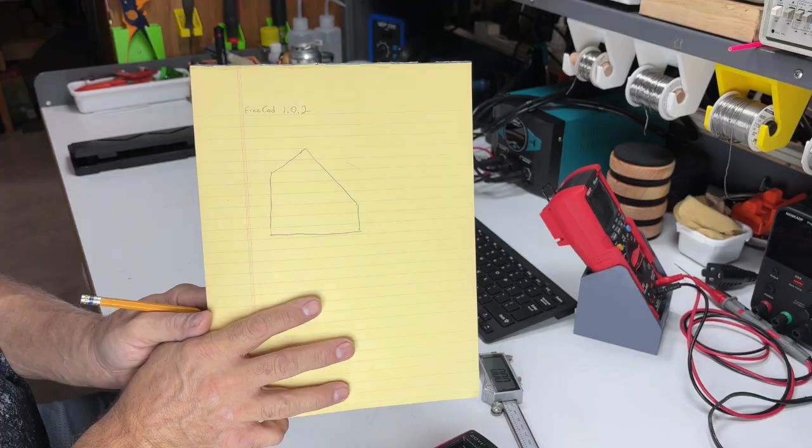So this is just a side kind of profile view, and we'll turn this into a three-dimensional drawing, just to give a little better representation so we can get our width - write down our width, which we'll start with.

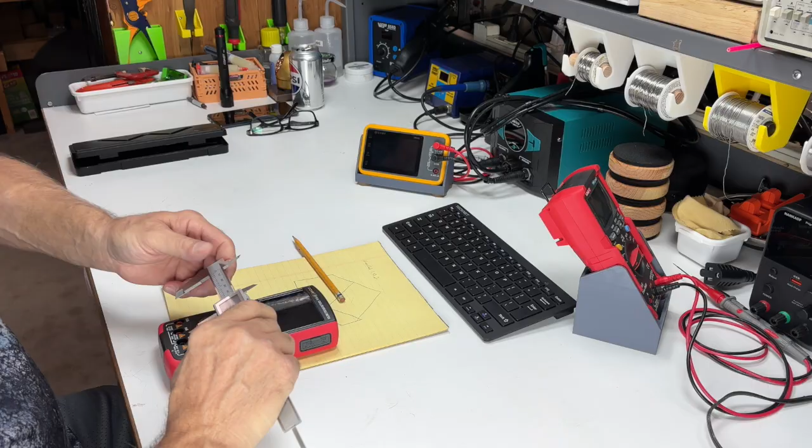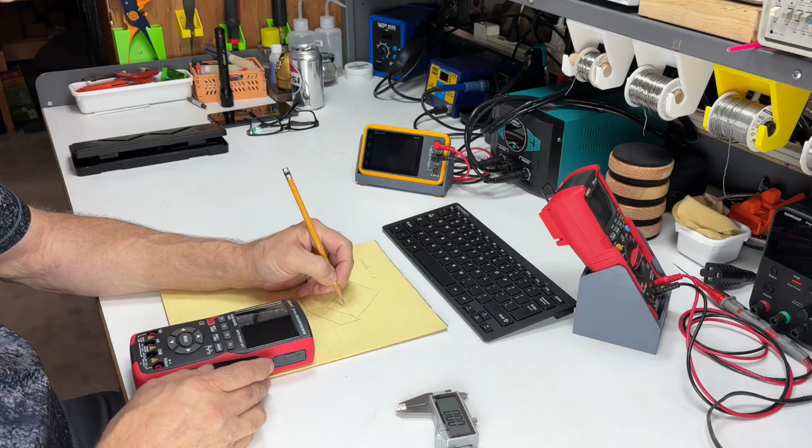I'm gonna call this - we'll call that 85, and these are the internal dimensions. When I'm measuring the external of anything, these are going to be the internal dimensions. So it's 85 to get it to fit in there, millimeters. Make a little note there. And then I do 3 millimeter sides, or pretty much anything like that, so we've got to add 6 onto that. So the overall width is going to be 91 millimeters. Sorry, I don't have an overhead camera working yet.

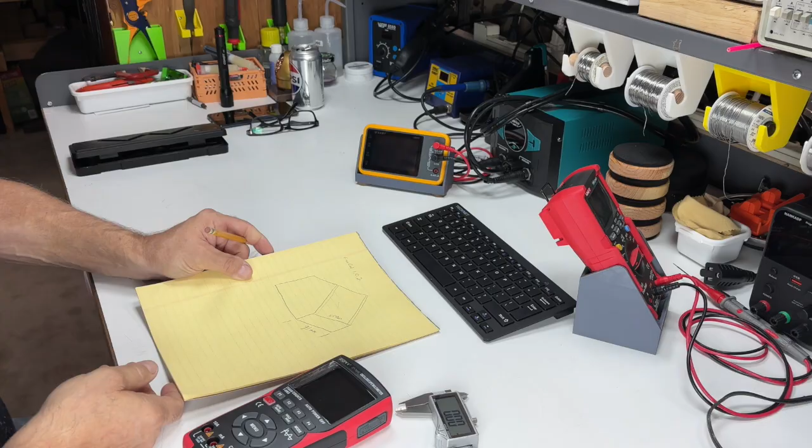Okay, then we need this - that was the width. We kind of need the front to back, or depth, I'm going to call it. And that looks like about - we'll do 38. So that's going to be the depth of the pocket, 38 millimeter depth.

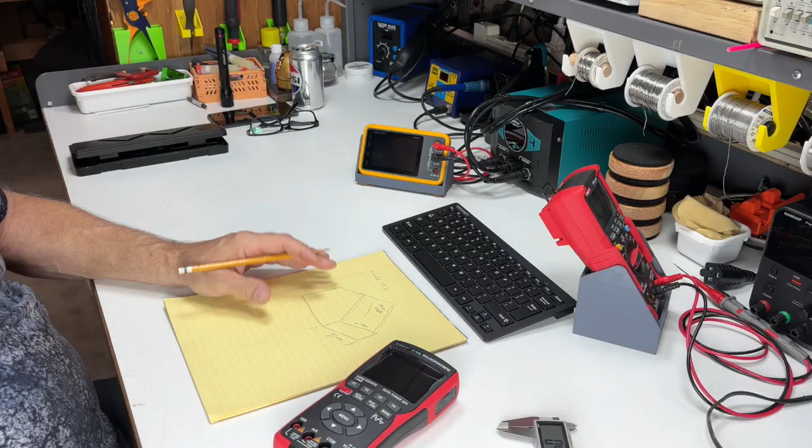And then I just kind of have to hold it up and do an estimate. You could actually do this on the paper - this is where, say the leading edge of the paper here is going to be where we want the flat front end, and 86 is right about here, so we'll just make a mark here, and then we can measure that. We got, we'll call that 96 millimeters.

That's 91, and then the height here will also be - it's kind of a judgment call here. We're gonna go with 90, yeah, we'll go with a 90 on that height. This is going to be a 90-degree corner.

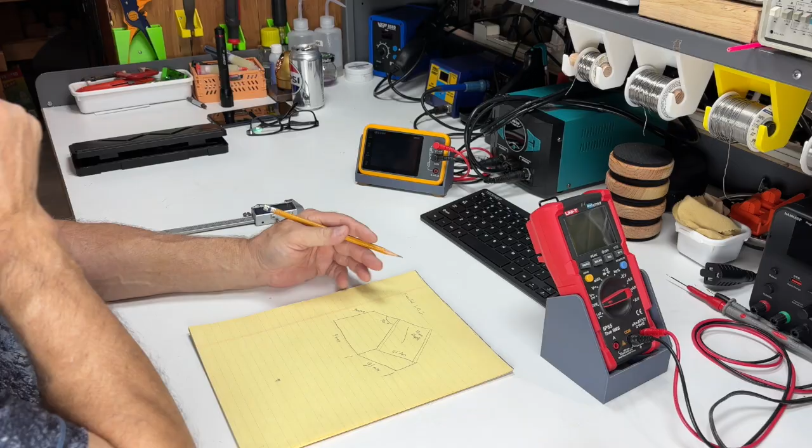So here's what we're up to now, and I think that should get us close enough to open up the FreeCAD program and get going. Don't forget to turn off your calipers so you don't waste any batteries. Let me get my keyboard out here and my mouse, and we'll be back in a minute with a different camera angle.

So I'm going to try and go slow, and this is kind of one of the most important boxes, right up here. Mine came up as Sketcher right now, but everything I have done - I have made a lot of very complex multi-gimbal swivel mounts. These are just some of the simple ones - I'm going to try and show a simple meter base, because this would be something I think a lot of my viewers would like, plus my best friend up north seen the couple I had, like I said earlier, and was very interested in.

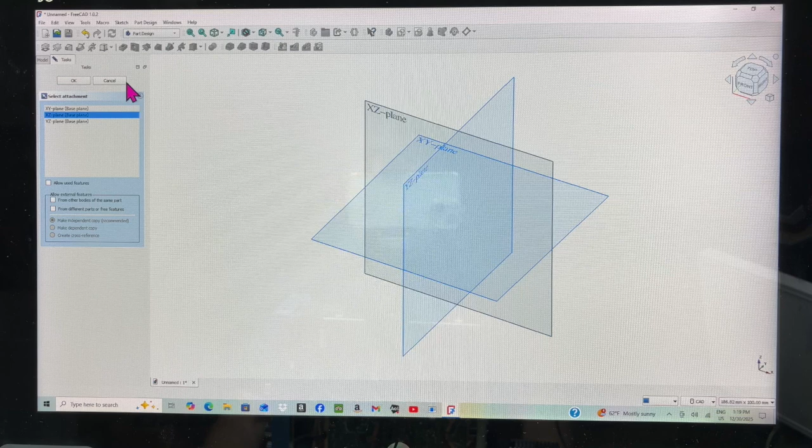You can either click on one of these to highlight it. Here's the XZ, which is what I would use for this particular project. So you can click there and hit OK, or you can just come over here and double click on the plane you want.

So I'm going to go ahead now and make that side view that I showed you earlier. It's just a rough sketch. You don't have to make it perfect, because we're going to put the dimensions in later.

But a couple of key points are here where we're going to go up first, and I got to find my... I must still have the old version on my other laptop that I usually work on.

So there's this weird shaped thing between the single dot and the single line, and this just allows us to make several points in any various shape. So I'm going to click on that. It's called a polyline. So we're creating a polyline.

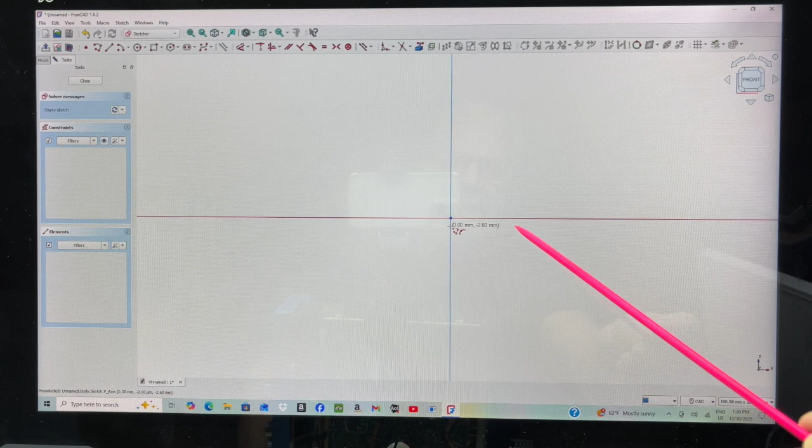That just tells you that you made contact with that line, and you do want to watch for your contact points. If you come right up to dead center, notice you get the X, and that's what we're looking for in this instant. That locks it into that point. And so that one is important, the first one, and then left click. I find it easier when you got the X, just let go of the mouse and then left click.

And then we can come over here, and you see here we have all of a sudden that half arch shows up. That means we're locked onto that line. It gives you some dimensions there too, but I don't usually worry too much about that.

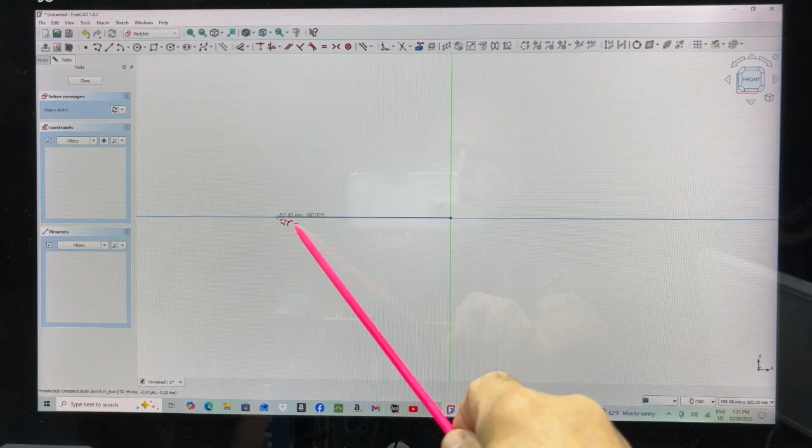This is going to be smaller. Also, the other indicator here too, so we're locked onto the line. We are also in a perfect horizontal position. So even if you're slightly off a little bit, the line disappears there. We got contact. When we click on that, it will make it perfectly horizontal.

And then we're going to go vertical. See, like right here, well, I'm going to make this one crooked intentionally, just so I can show you how to straighten that out. And then we're going to go up here.

Let's just say anywhere here. Like I said, we're just making a rough drawing. Now we're looking for that half arch again, because we want to be locked on that line. And then click. And then we're coming down, and we're going to connect with that very first point that we made.

And there we got the X, and we can click on that. And now our box is contained. You right click a couple times to get out of the tool. The lines are orange here, so that means something is weird.

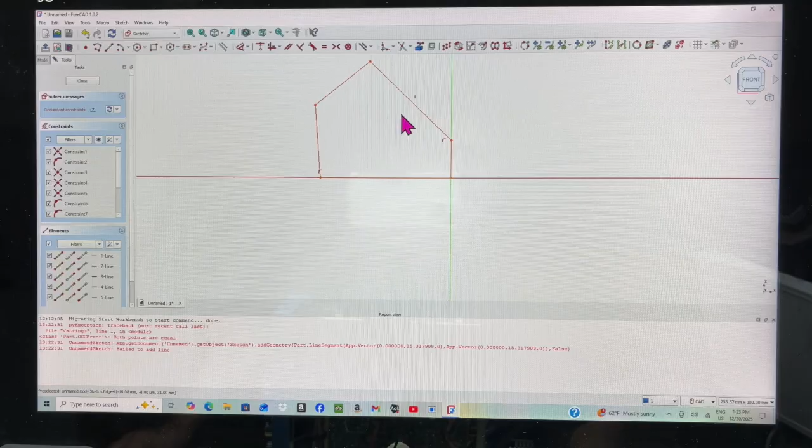We want them to be white, and so sometimes you have to... I clicked on that little vertical line there, they turn green, and then hit the delete key. Nope, that didn't do it. It's probably one of these arches then. I don't know if that was that last one. Usually if you pay attention, you can know which one it is. Okay, there it is. It went away.

Now we got the black line. And if you grab any one of these points now, you can see everything is still all movable because nothing is locked in.

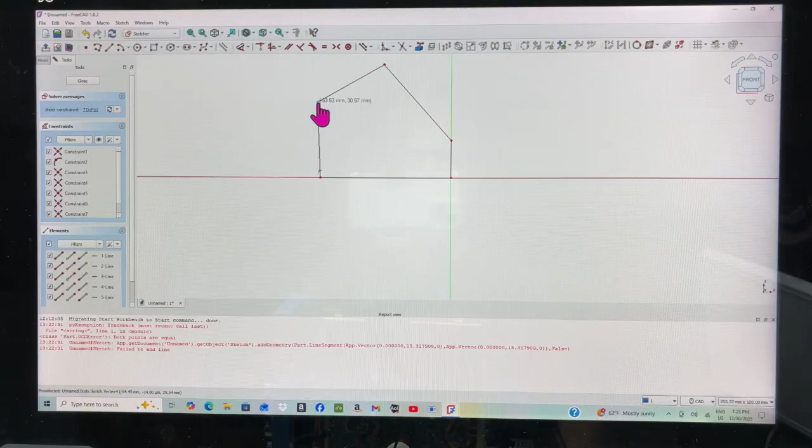And the lines are all, so you can do any kind of weird shape. So don't get too excited about trying to get things perfect. Just get it all kind of laid out.

And then we're going to go to those dimensions, like our base right here. We're going to click on our baseline and see how it highlights. You can choose different colors - this is just what came up. I haven't changed them. I did the download this morning for this particular computer because it'd be easier to see, I think.

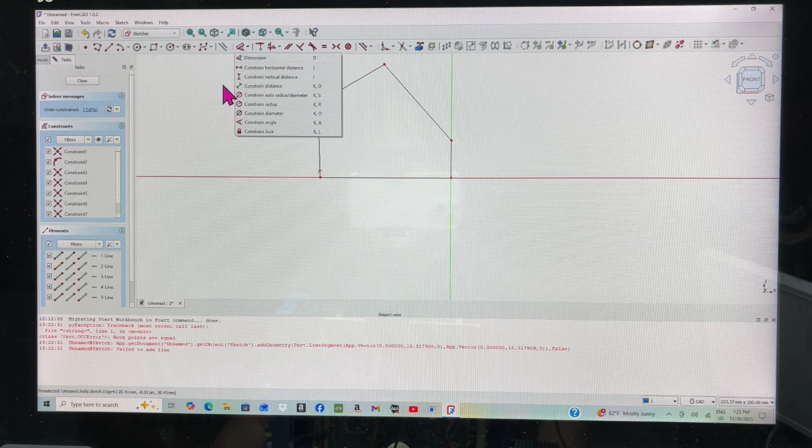So I've clicked on that, and now I have to go up and find... okay, so now this is it. You have to click on this box. I think it was simpler the other way. So we're doing a horizontal line, so we want to pick - here's your horizontal, here's your vertical. These are weird, anything that isn't straight across horizontally or vertically, then you would use this line. But we're doing a horizontal one, so we're going to click on that. And I guess we're going to come down and click on the line.

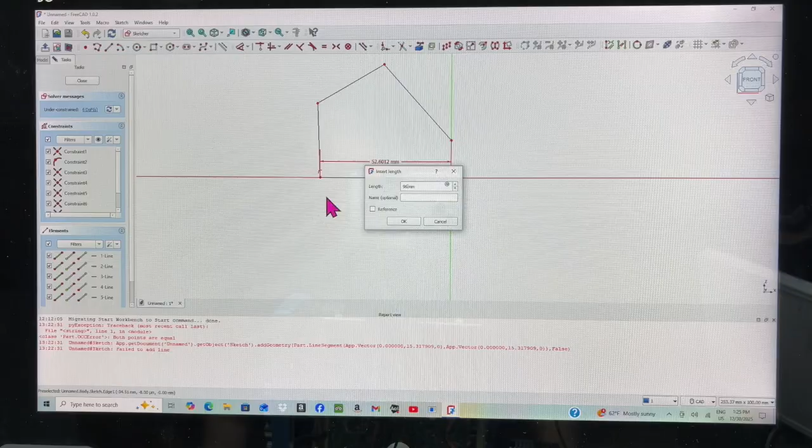And now we can put in our length, which was, for that base, was 96 - I have my keyboard back here - 96 millimeters. And we put in 96, and then you can come down here and hit OK. And that stretches it out here. We're going to zoom out a little bit.

Screwing up here, trying to make it bigger in the center. Okay, well we're going to have to go up higher anyway. So that's our width. And then our height here, we're just going to - I'm going to right click to get out of that. I'm going to just drag this over because this is going to be one of our vertical lines. And go up to here, I guess, again.

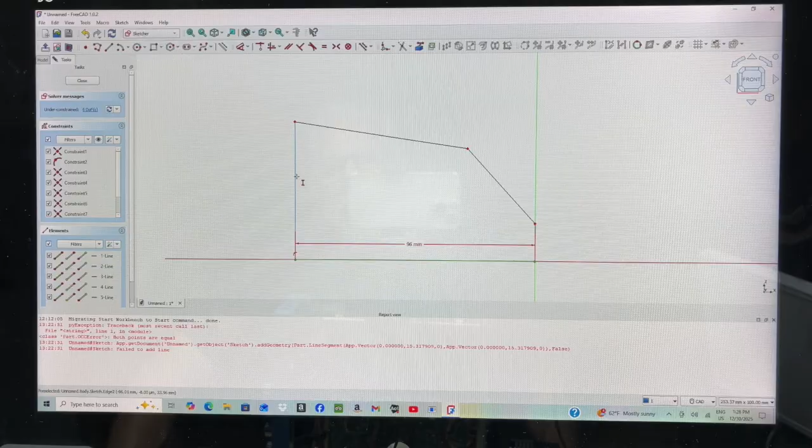And we are going to go to our vertical constraint. And then when the line turns, in this case, light blue - like I said, your colors could be different - you see it change. It goes from whatever it is standard to when you're hovering over it. And it's nice, you don't have to be right on. You see it stays blue for a little bit, so you don't have to be exact. So as long as the colors change, you're there.

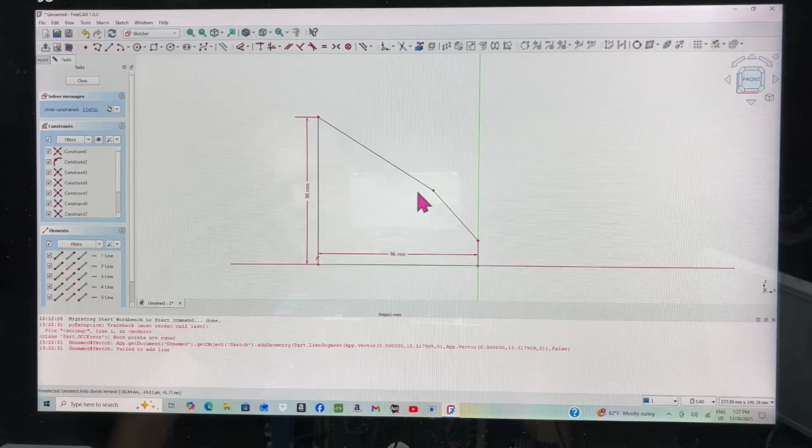And then now we can put our - we're going to do 90 millimeters for height. And you can click OK, or you can just hit enter on the keyboard also. So there's our base and our back height. And now actually, I'm going to get out of this, and we can drag this up. This is where we're going to get our point here.

And now this is going to be another trick because I got to find where - usually I click here, click there. Yeah, see, that's not holding - I'm so used to the old way now. This is a little bit of a bummer for me too. So we're both learning.

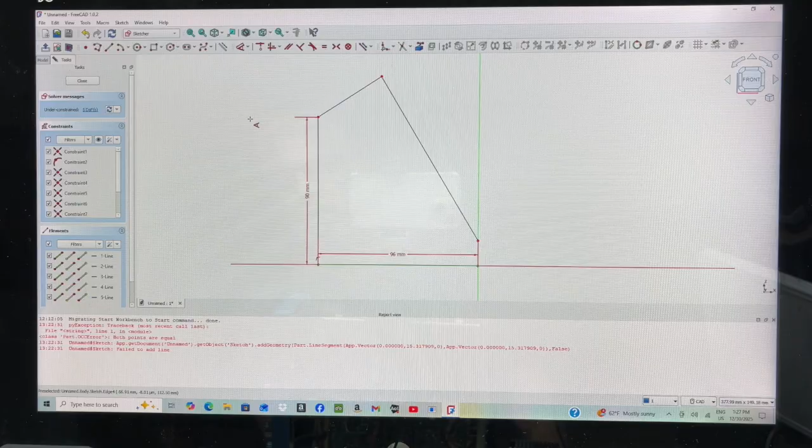So let's go to here and see, okay, so here's the angle constraint. And now we're there, now we can click that line. I'm not sure if we have to - okay, you don't have to hold down the Control or Alt key, it just takes both. And this one we're gonna want - this is the one we want a 90-degree angle. So we type in 90, hit OK. Now that locks into 90. So now we'll right click to get out of that.

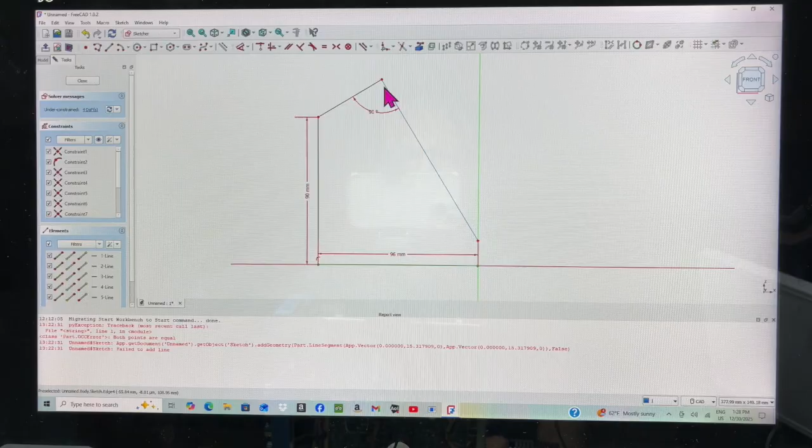Now if I grab this point, the 90 always stays there. And see, this line isn't perfectly - so we're gonna, let's see if we can do where do we gotta go for that one now?

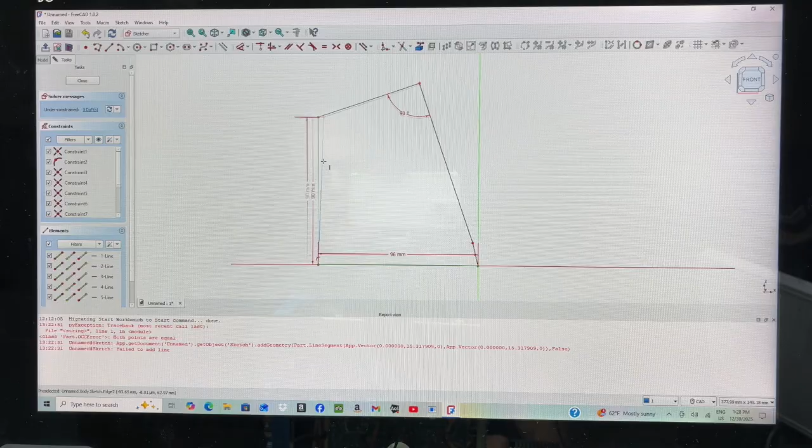Here we want the vertical constraint. And then when we click on this, you'll watch it snap right over to perfect. Now, right click to get out of that. And then if we grab this point again, you'll see now only a few things are changing.

See, and then we'll come down, we'll go back up to this one and do our vertical constraint again. And we're gonna click on this line and it'll snap over. Right click to get out.

Now, when we grab this, you see we only have limited - we keep getting smaller, and ideally it's called a constraint. That's the other thing that was very confusing when I first started out. I didn't know what a constraint was, and it was very hard to find. When things are locked in place, that's when it's constrained. So this and this and this are constrained now, and this 90 is constrained. But we can vary distances, you can see on those two, because we haven't created a length for this yet. So let me just see here.

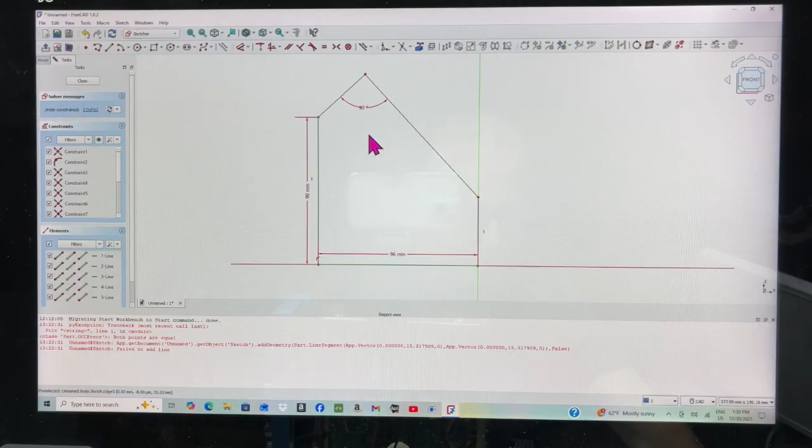I think we're going to go with... I didn't get that one to measurement here, but I'm thinking that's going to be around 30 usually. Let's do 32. We're going to do 32 millimeters.

So I got to go over to this weird looking icon, but it says dimension. And we're going to go with a vertical constraint and come over here and click that. And we're going to do 32 there and hit OK.

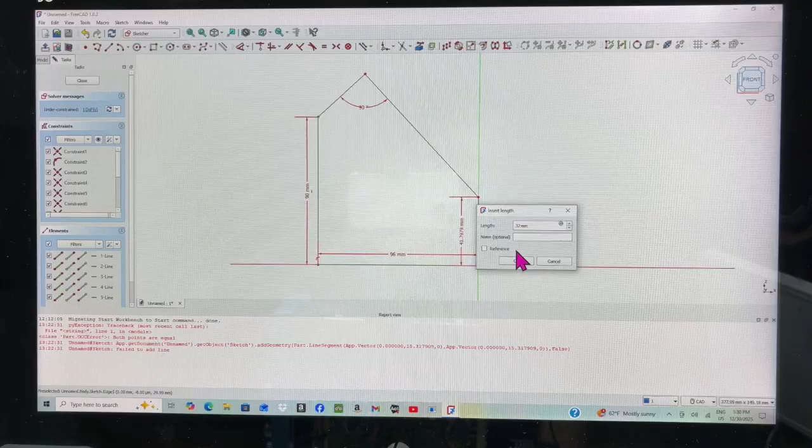And now I don't even know, I'll right click to get out. Usually I don't have to, so you can't go up or down. You can only move this one line because there is no constraint yet.

So to get the 35-degree angle, we're going to go to the angle tool, constraint angle, click on that, and we are going to click here and here. We want 35-degree angle, but this is an obtuse angle we're working, so we have to take the 180 degrees of a straight line and subtract the 35, and that would be 145 degrees. So we're going to put that in and say OK, and then that sets our angle.

Everything turned green here now. Right click to get out, so you get your arrow back. And now nothing will move. It's all locked in place. You can't drag any of these pieces. So that's our actual size.

Now, off to the left here, it says, if you can see, it's fully constrained. That lets you know that you can continue with other things.

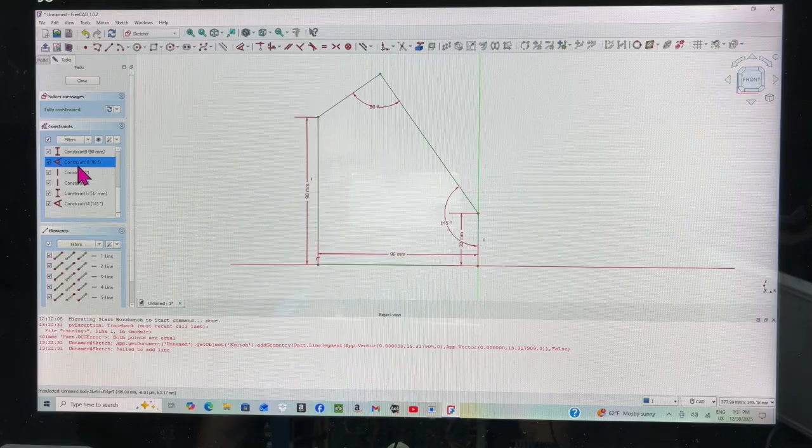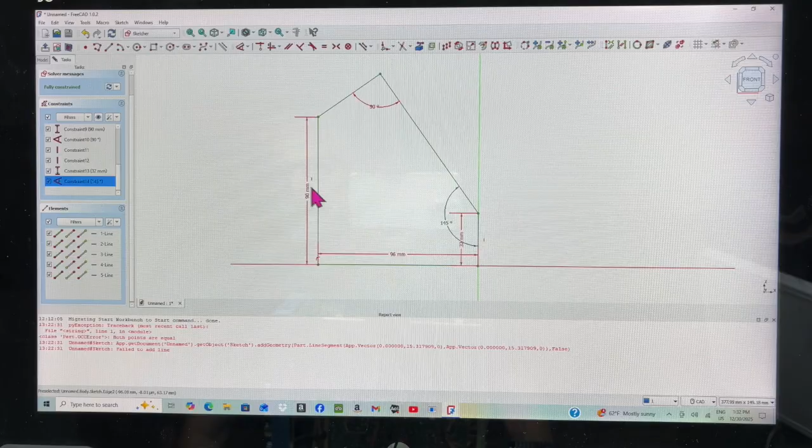Now, you can go in here and change any of these things to different dimensions that have parentheses here. By right-clicking, then it says change value, and we could go in there and we could change that 32 to a 30 if we want. We're going to leave it, but just so you have an idea where that works with anything that works with the angle constraint. Right-click, change value, there's your angle, we could change the angle. Cancel. But we're all done with that.

So you got to scroll back up to the top here. Oh, it looks like something changed here now with the new. Oh no, here it is. They got it up here now. So now we're going to close out.

We're going to hit pad, which sounds weird, but because we want to extend this out now to build our solid block. We're building a solid block, and then we're going to cut away on it. So it's called padding. It usually pads with 10 millimeters. When you click on that, it pads it out.

We're 10 millimeters, but our particular, what we want is 91. So we're going to put 91 in there, and you can hit OK. And now you see we get the full, you're starting to see the full project here.

Now these keep popping up, and I don't know enough. Migrating start workbench to start command done. I don't know, I just X out of those.

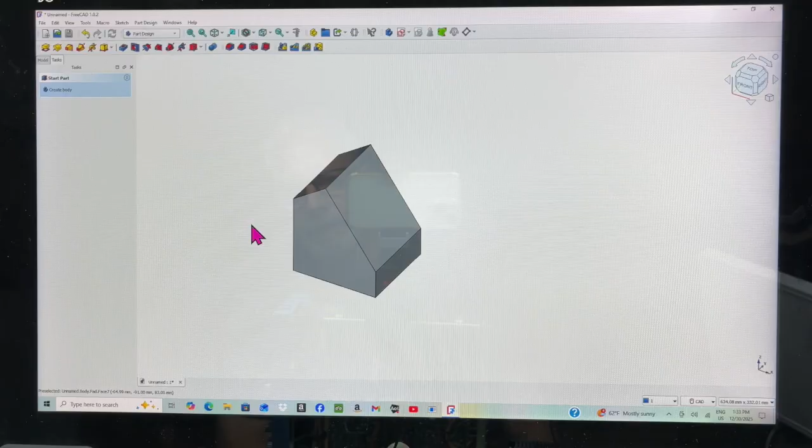This is what I'm happy with. Now we have to start working on cutting out the block for the actual meter itself.

So I'm going to go to this face. I want to cut in the notch. And this is the face I want to be, so it's parallel with the back, with this front face. It's going to be an opposite kind of 90 of what we have. That'll be recessed for the meter.

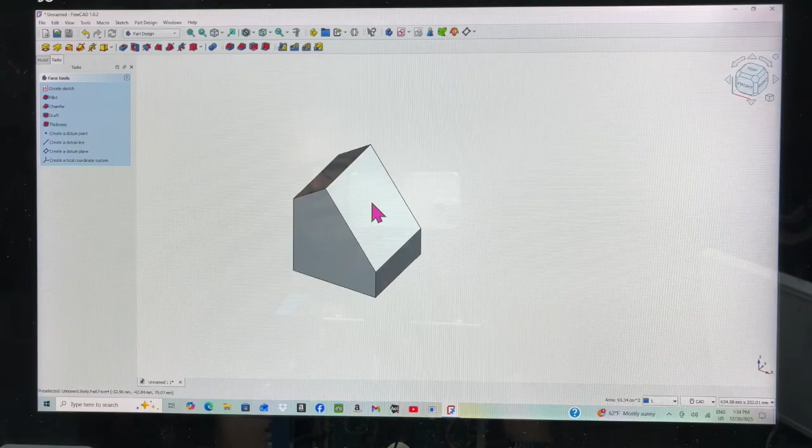So this is the face we click on, and then we want to hit, you can either hit create sketch over here, or you can use this little box, a square and a circle up here, and hit create sketch. That redraws.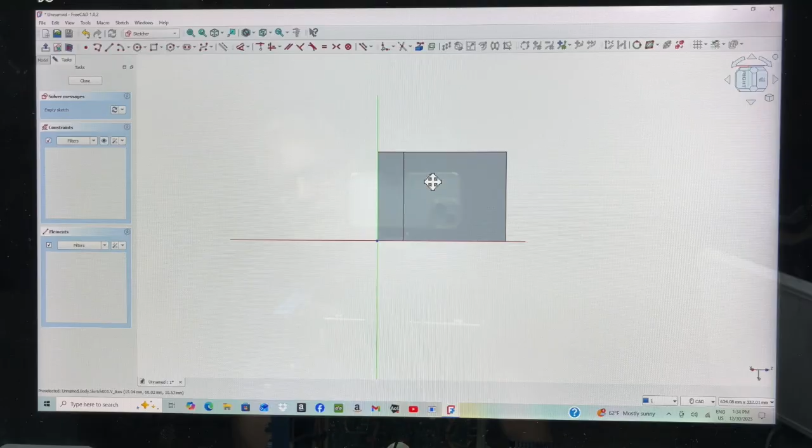Now we're with that. I'll try and let's see here. I'm going to shrink this down here a little bit, or move it. I can go here and do it over here at the box, just to see.

I just want to see where I'm at, because when it flips it around, so this is the face I selected, that we're going to do the cutout now. And this, it took the bottom line. So we are going to have to move this line. We want to come up even with this line because that's where we want to start our cutout.

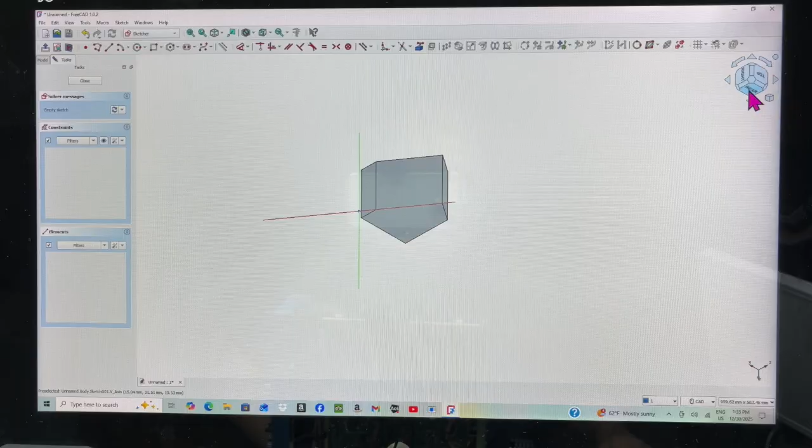Now this is a little more complex. Here, model. I bet you it's under there. Okay, I don't know what that one is.

So this is different - this is a history of what we've done. When you're under pad, here's the sketch that we had, our initial sketch. You can always go back and change things, and that's kind of backwards of what you'd think. I would always think sketch would be first and then the pad, but the sketch is contained under pad.

You use these little drop down arrows. Here's the next sketch is where we started - I'm going to close that one. Going back to model to get back. This is a redundant one just because I clicked on it, so I'm going to delete that one. This is the way it should look now.

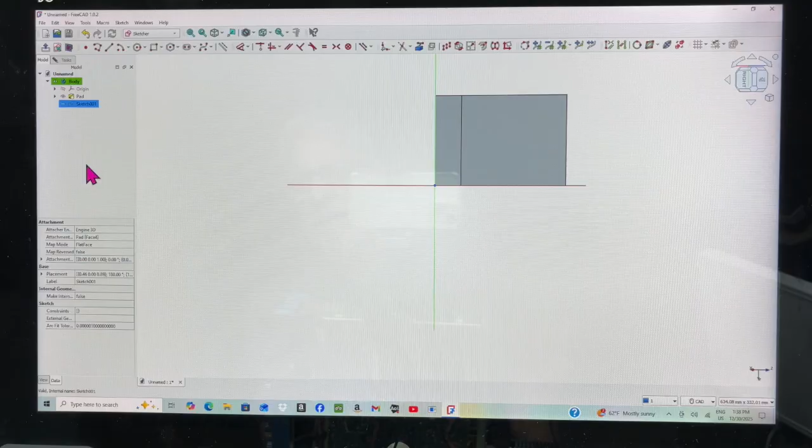So here is our second sketch, and now we got to go to the model and click only once on the sketch, and then we get all of this. So this is where it gets a little tricky - we want to change this, it's called an attachment point.

We want to move that to start our cutout. You have to click on the attachment and then the position, because we're changing the position of where it's attached. I'm just going to guess it's usually Z for the face I choose. You can just do a couple clicks, you'll see if it's moving. So I'm up to 3 and it's not moving anywhere.

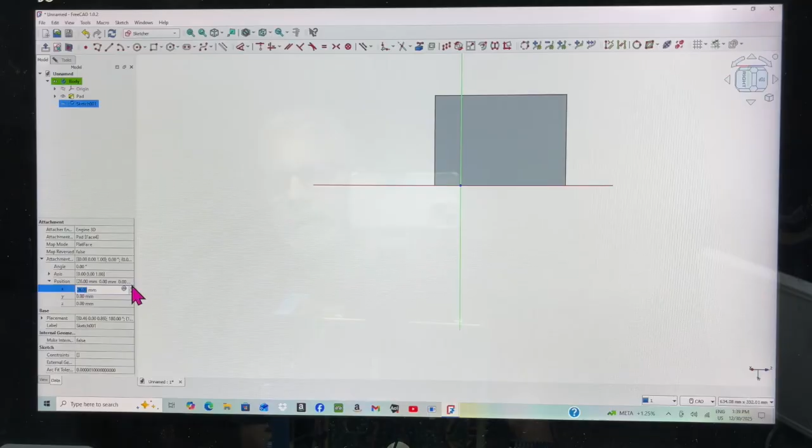So let's try X. There we go, see, now it's moving. This should end up being 32 because that was the height we made. And nope, for some reason it says 25, but it knows.

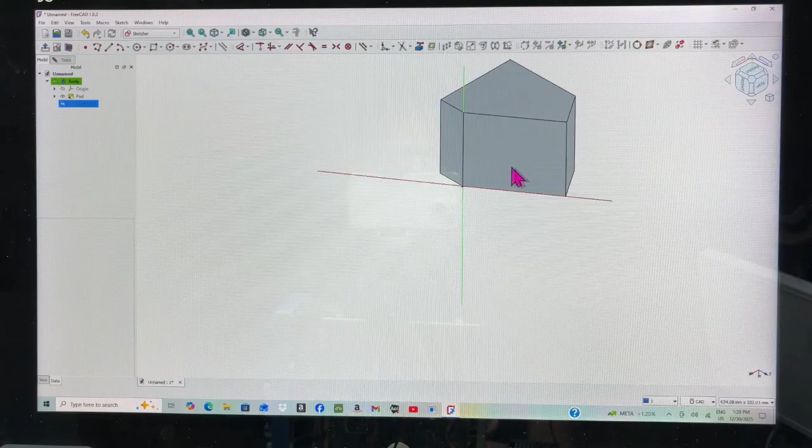If we go past, you'll see your past, one back, and we're right on. We want to just double check that. We can go up, click on here - see, here's our bottom, here's our back, and this is the space we're going to make a cutout for the meter. So everything is good there where we're going to start.

Now we want to make the box for our cutout. Here it is, here they are, good, so it's already in box mode. Now you can, later on, there's different boxes you can do - centered when you're doing symmetrical insides and outs, and rounded rectangle, that's a new one. So this is definitely a newer addition than what I've been using previously.

I just got this computer out on the workbench, and it's an old computer, but I was getting it set up. So I'm hoping this will be easier for everybody to see because it's a bigger screen.

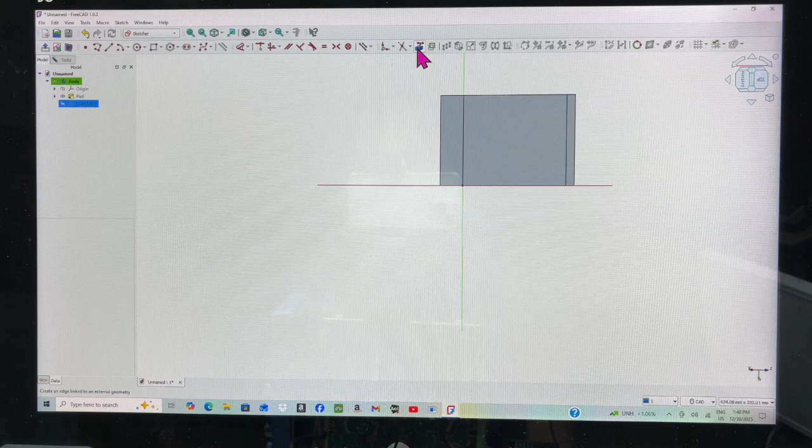So we're just checking rectangle, and then I'm gonna right click on that to get there's this little weird box here - it's like a little barbell on a pedestal on a box. And that gives us, this is the... it puts, well let me just click one here, and I'm trying to think which one I want to click.

Well we can click this one - we know we need this one for sure. And then you see you get your 2 dots, and we're going to need those 2 dots for figuring out how many millimeters our edges are and stuff. And this way doesn't really matter.

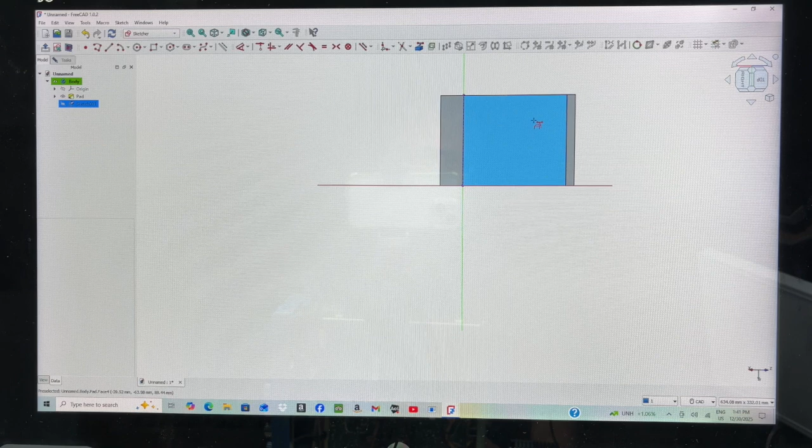So we're going to right click, get out of that, and then go back to the box, select that, and we're gonna click - see, we get that little arch again, means that and the line changes color, but that means we're clicked on that line, we're locked on. Just press once, then drag, and then press a second time, and then right click to get out of that. And this is where we're going to use these dots that we formed using this little box up here.

And then there again, now this will be interesting - see the dot highlights, I'm going to click on it, and then I'm going to go up and click on this dot, it turned green, and it's not giving me a vertical dimension. So I think we just have to go to the vertical constraint. Oh okay, I clicked them to hit the vertical constraint.

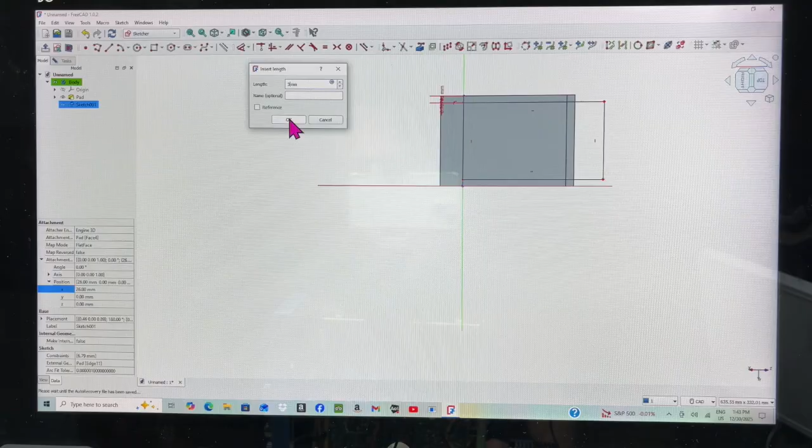Now I can punch in the 3, because we want the wall thickness to be 3 millimeters. That's a good sturdy but thin without wasting plastic. So that locks us into thin 3 millimeters there.

We're going to go down here again. I hope you can see these are changing color, but you just got to get close and they change color. Back up here to the vertical constraint - we're going to another 3 millimeters there. Okay, thin that out, and this is fine.

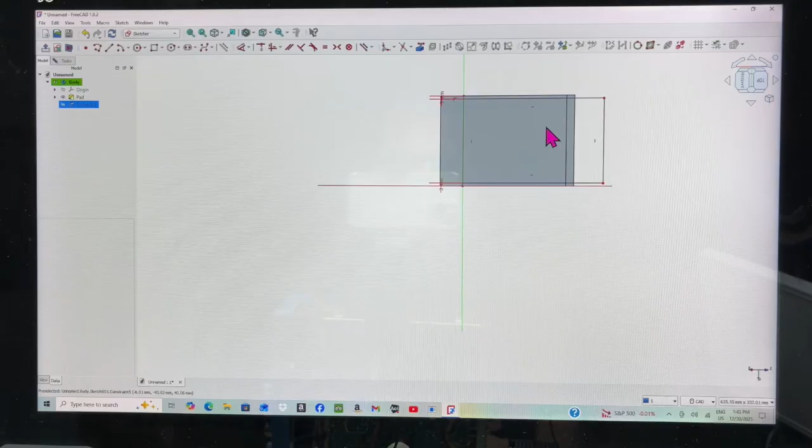This doesn't matter if it overhangs, because we're just cutting into the box anyway. So we just have to highlight one of these and come up to horizontal, and we can just constrain that like that. Hit OK - now everything will change, see our main box we're working with changes to green.

Go back to tasks here, and we're all done, fully constrained. You'll get error messages if you're not fully constrained, but you can tell again when the box changes color. On both my computers it's been green, but you can customize your colors.

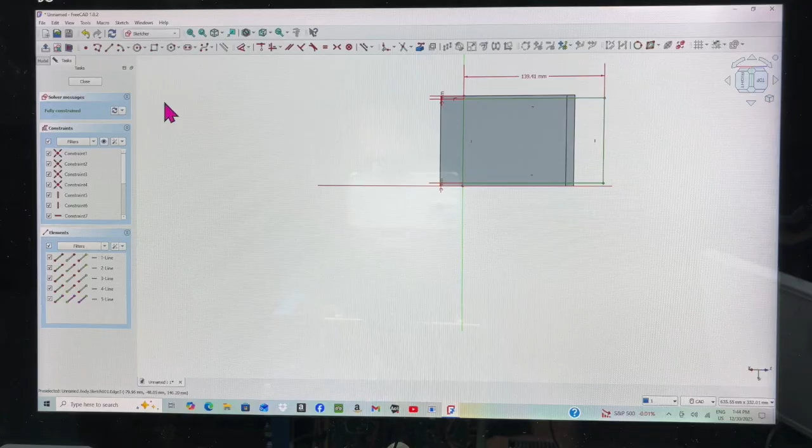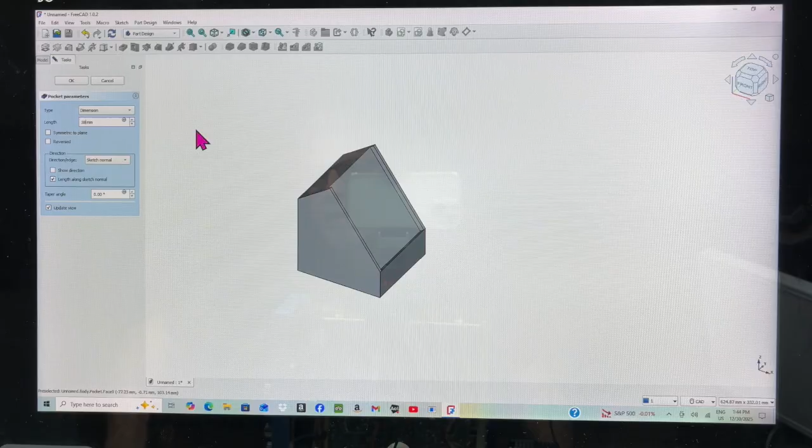We're going to close that and go to task, and now we're going to make a pocket. We said we wanted 38 millimeters deep, so we'll see how that works out. Click on the pocket, see how it went in 5 millimeters here, you can kind of see in the recess, but we're going to put in 38 and hit OK.

And there's our box now. I do miss the rotate, it moves it around but doesn't rotate it. That's something new I'm going to have to figure out. You can always rotate it like this, and take a look all the way around.

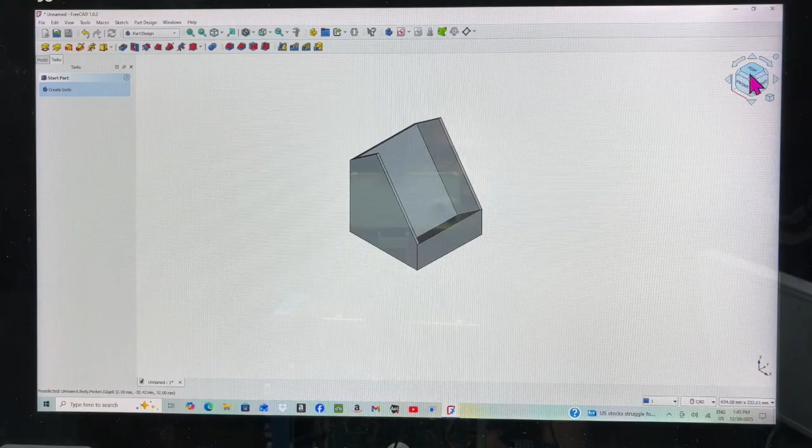So that should be it for our main box. Oh, let me just show you one other thing we got to get, is the top view. Once we're in here, there's a little tape measure thing here, a standard measure. Oh, it looked like a pipe wrench to me, it's a caliper. Okay, so we should be able to click here.

Oh, maybe that's not gonna. Yep, there's the 38 millimeters, so it is 38 millimeters deep. That's a little nicer than the other one once you get used to using that. And we can just close that, we don't really need it, I just wanted to double check that we were deep enough.

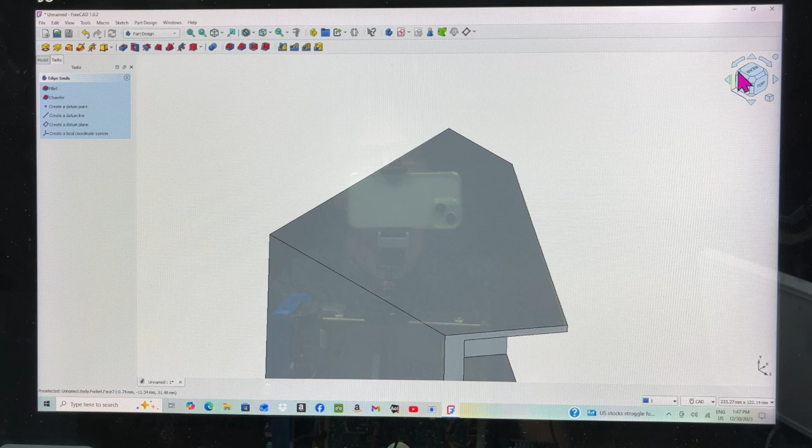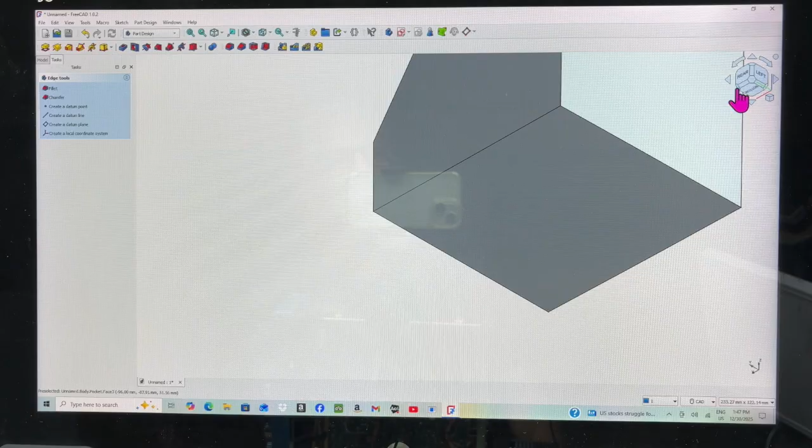And now we can go back to, oh, I guess we didn't want that view. We're going to have to go around a couple times here because I went the wrong way. Come on. God, it's so much easier when you can just grab it. Used to be able to just press the button and grab.

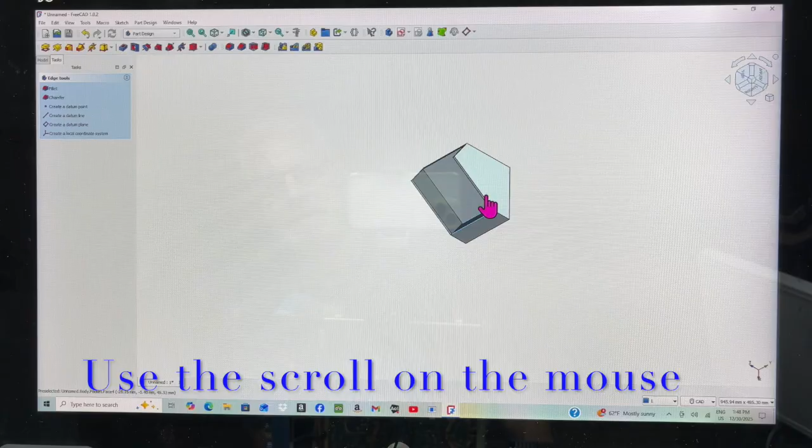Let's try to see what the down arrow does. Okay, maybe this will give us the... okay. And if it's for some reason way over here, off screen, you just pull your cursor over here and then it sucks it toward the cursor. Once it's centered, then you can kind of blow it up to whatever you need.

So you can work on the finer things here now. Okay, now we want to round these corners off here just to give it a little, make it look a little nicer. So you can see and click on that line.

Now here, I believe you'll have to hold the control key. Yeah, control key on PC, and I think it's command on a Mac. But that highlights both those corners.

And now we want to go in, we're going to go to fillet. And that works both for filling in a corner, I'll show you filling in a corner here too. We'll do that, but it's rounded. The chamfer version is an angle.

So we're going to do the fillet because we just want to do a round. Why not have the round? So we're going to click on that. And here you can just kind of, you see it made a little round corner, but let's just start off with like 12 millimeters, roughly a 1/2 inch radius, and we'll just see how it looks.

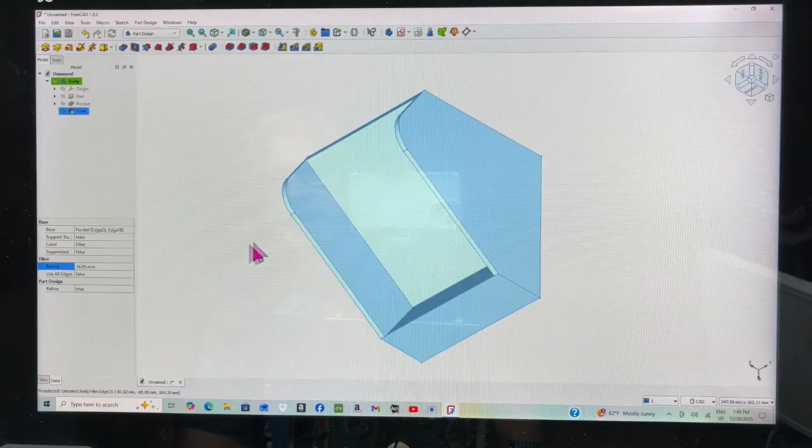Go to OK there, and yeah, we can see maybe a little bit more here. So we can go back to model here to the fillet, and then down here it's 12. Click on that, and let's go to 16 millimeters. Just hit enter, and that made it a little broader.

And then here I'll just show you the inside. Let's see, how are we going to get this? Will do. Oh, we're going to have to go. We're going to go here. We're going to lock in on this one, and then we're going to have to go back.

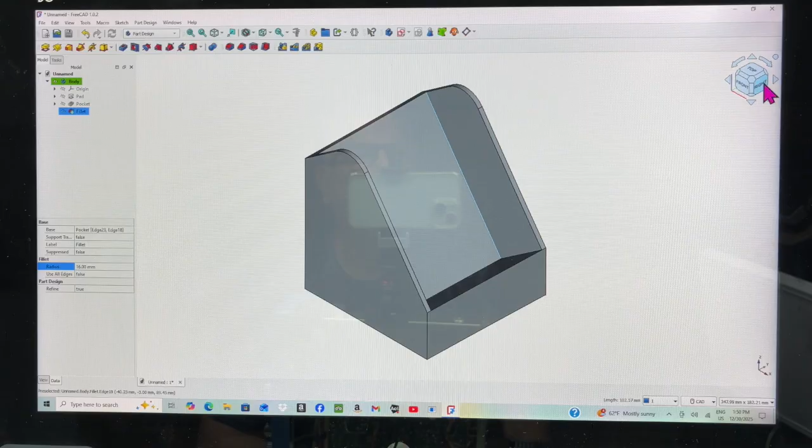And hold the control key and lock in this one, and then we're going to go to tasks again, and let's do a fillet, an internal fillet. So there, it made an internal one, and our meter is, let me just take a quick peek at it.

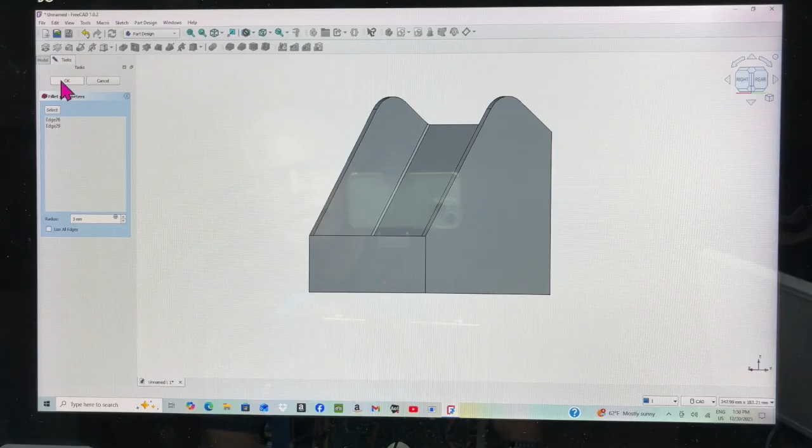We got plenty of radius there, so we'll just do like a 3, just so you guys can see, and that'll strengthen your joints too. You just have to make sure you have your clearances. Click on OK, and see it makes a nice internal fillet. So either way, it's either convex or concave, depending on what surface you're working on.

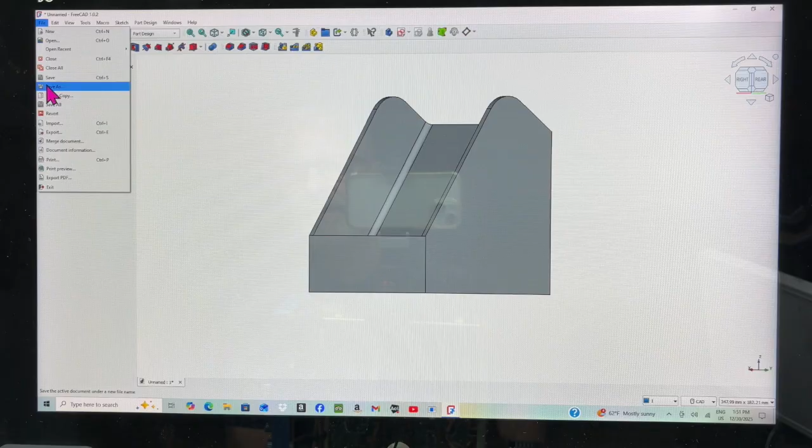That's as fancy as I'm going to get with this. So then we're going to go to File, and we haven't even done anything yet. So I'm going to hit Save As. And that way I can actually type in...

The meter I'm making this for is a Zoyi ZT 703S. 703S. And we'll put stand.

Let's see, make sure, where am I at here? Document, I want to save, I'd like to... oh, it's under Jeff. I want to save to the desktop. I save everything to desktop. Okay, oh here, I got to click over here. So now this PC desktop, I'm going to save that to the desktop.

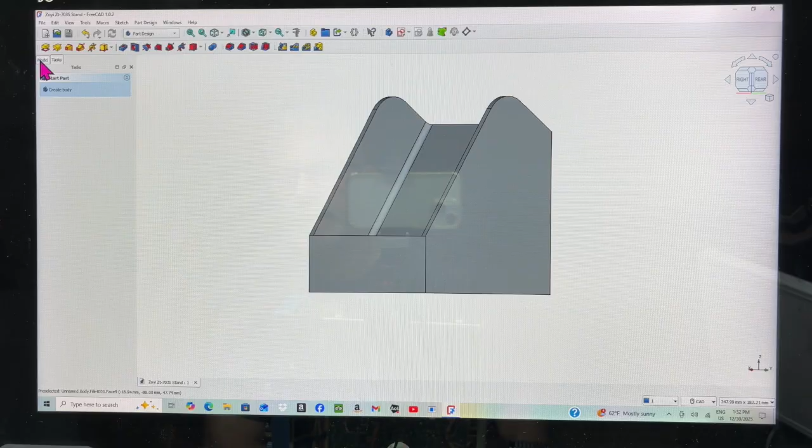Okay, and then now here's the tricky part. That saved the file for us so we can make some changes later. But now we want to actually get it ready into a printable file that a printer will recognize. So we got to go to Model, and we got to make sure that the body is highlighted. That needs to be highlighted. And then we're going to go back up to File, and then down to Export.

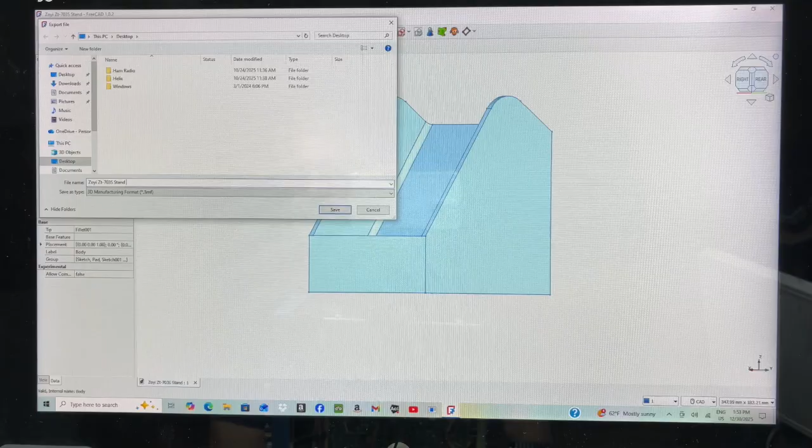And here it comes up with, and it always says body on here, I just... don't know why, that's weird. It's not. There, it didn't want to delete. I think on this computer I probably need to hit the backspace. So now it's the 3MF format, manufacturing. And there again, I want to save that to desktop.

Okay, so now we should be ready to go to the next stage. We'll be back in a minute with that.

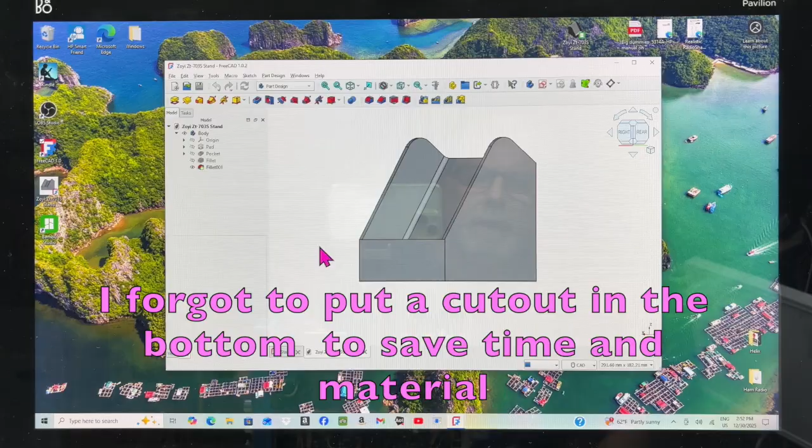And we are going to go back into... I want to go... we're going to go face on, and I want to go on the bottom, click on this, and we're going to hit sketch. And there we are. I just have to, when it twists like that, I lose my orientation.

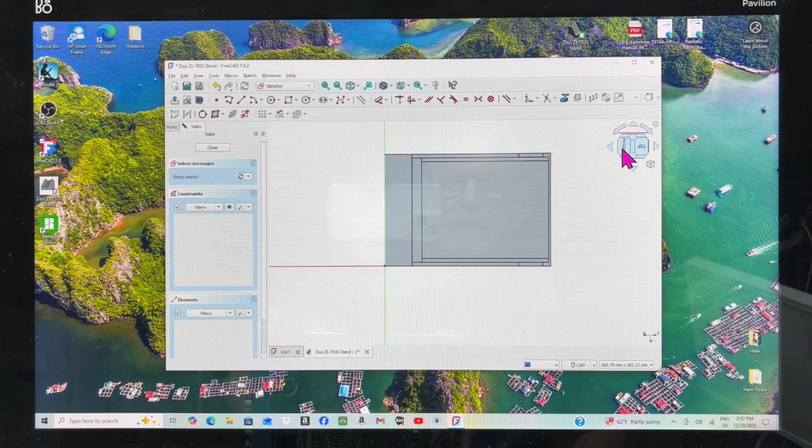Okay, so we got to go horizontal with this. So here we're on the bottom now. Okay, I'm going to grab a box thing. What I'm doing is, instead of wasting plastic here, we are just going to go and make a big cutout. Something like this.

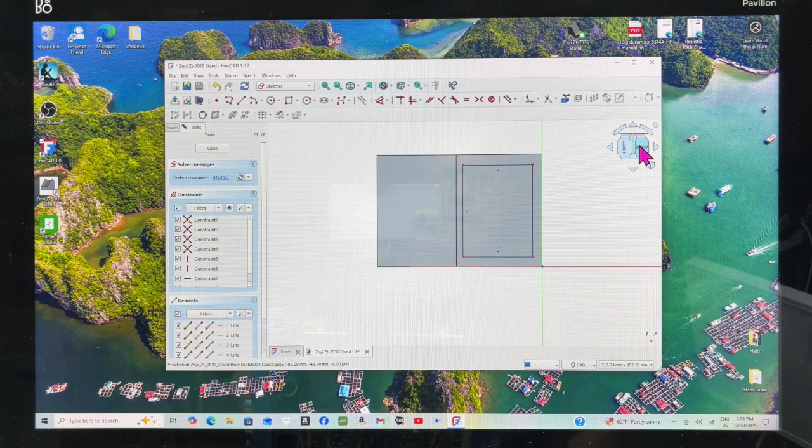Right click to get out of that. I gotta just take a peek again because I already forgot. I'm pretty sure that's the back and this is the front. Yep, okay, that's the front. And this is that little barbell box thing here, that's giving us measurement points. There, right click to get out of that.

And let's see, we can go right to, on this back side, 3mm, excuse me, I'm gonna have to go up here. I should have probably enlarged this for you guys, but we are just doing a quick fix here. 3mm there, that takes it out to there. And the front here, I think we'll do 6.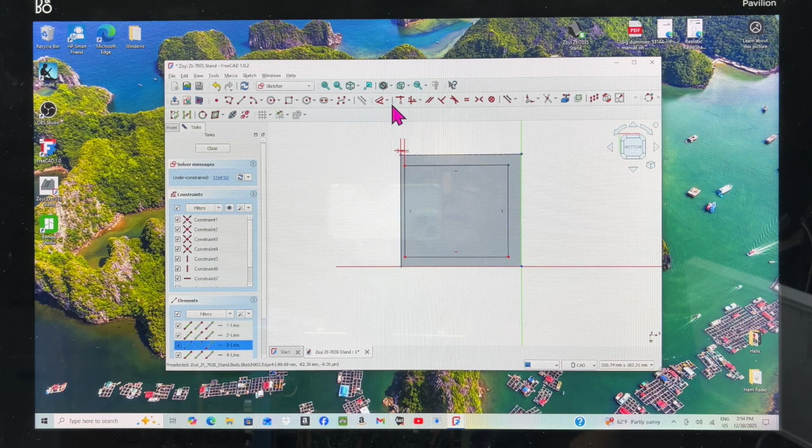Horizontal constraint, we'll do 6mm, about a quarter inch. We're gonna, maybe we'll do 10, leave a little beefier up there. Okay, and then on our sides, probably just want to make a slot. We'll go with 40mm.

So how do I want to do that? Well, 40 in the center. And I don't know, I forget what this was. Let me look at my paper, that was 91. We want a whole 40mm across, so that would be 49, right? If we take 91 minus 40, we'll just take off 41. That'll be 50 divided by 2. We want 25mm on each side.

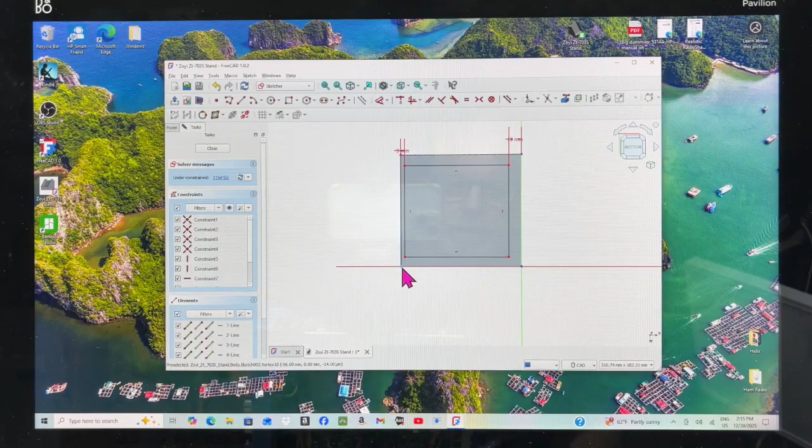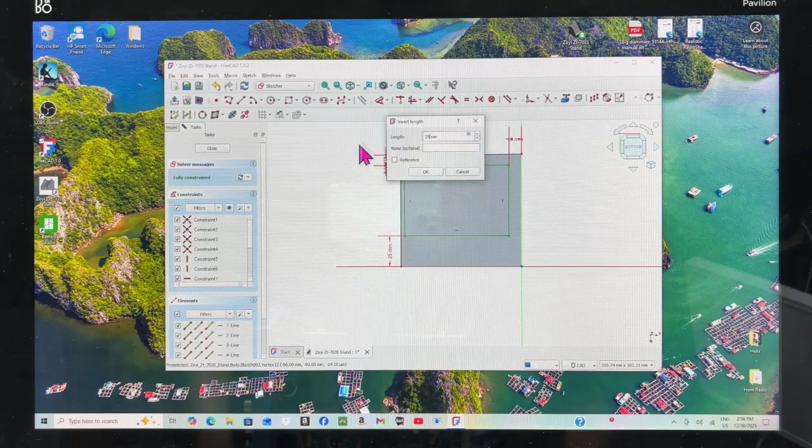So click here and here. We're going to see how this turns out. We're going to go to vertical, we're doing a vertical constraint now. And we'll see how, 25 there, and vertical constraint, 25 here, hit OK. Well, that's a pretty good slot.

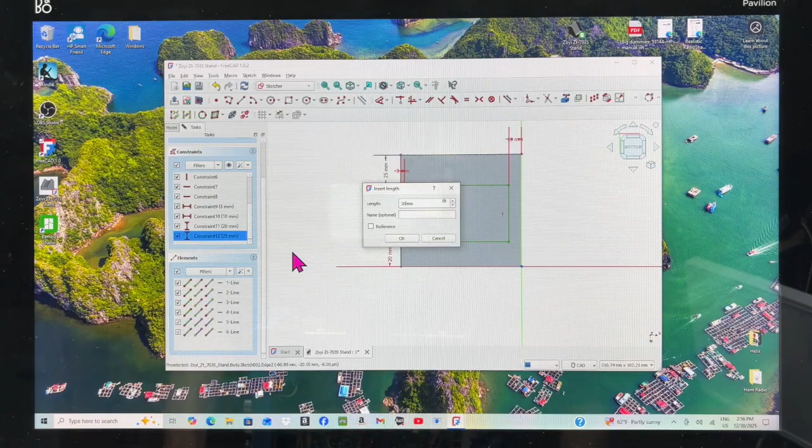Now here's what I was telling you earlier, we can go over here. Here's the 2 that we just put in, and then that looks like, let's just try one at 20. We're going to change it to 20, this is how we change it, hit OK, that narrowed. Yeah, I think that's going to be okay. We're going to change this one to 20 also then, we want it to be symmetrical, 20, okay, and it's all turned green, so we're fully constrained.

If we go up here, it tells us we're fully constrained. We can close, and we're going to go back to task, and we are going to pocket. And we want to pocket, let's just go with, I think 90 gets us clear. This doesn't have to be exact, but now we'll see.

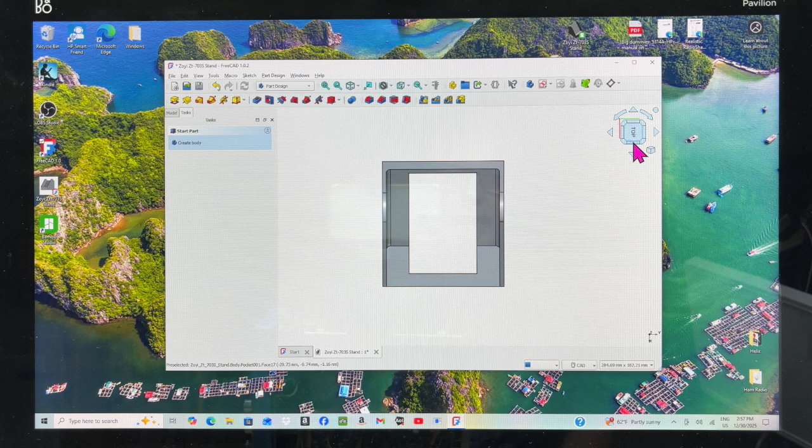There's the top. See, that saved us a lot of plastic and printer time. And we don't need that for support, we just need the support around the edges, so that'll save us some.

So we'll hit the save button, that'll update the deal. And we got to go back to model, highlight body. This one we have to actually re-export because it's a whole different file now.

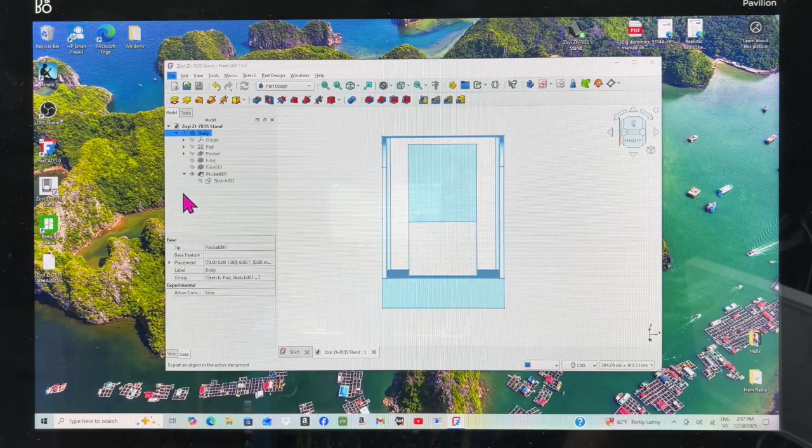I am going to go right to here where I was before, and I'm going to try the backspace key, see if that works now. Okay, and I'm going to put 2 on here because this is the second one, and we are still saved to desktop, and we're going to hit save.

And it should show up on the desktop somewhere here. Here it is, save to. Okay, it's over here, I'll bring that up to the top. I'm going to open Bambu Studio now.

Thinking, I gotta wait a second here. I might not... here, let's right click and open. And we're sure. No, it's opening, yeah, I don't think I double clicked on that last one.

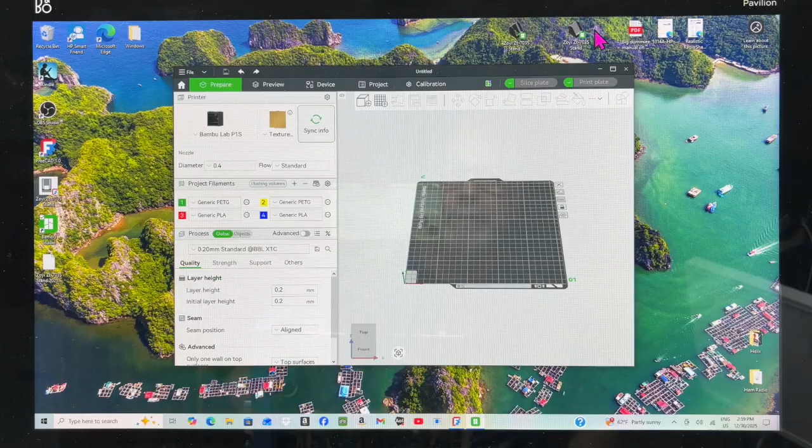Okay, and we don't want to use that one, we want... because that's the solid version. We're going to drag number 2 in. Here's number 2, we're going to drag number 2 in. Change that out, and there you have it.

Now we'll see, that was, I forget what the last one was, like 3 hours or something. This will be a little less time and save plastic.

We're still, everything is set here. Quality strength is fine for this. Slice plate.

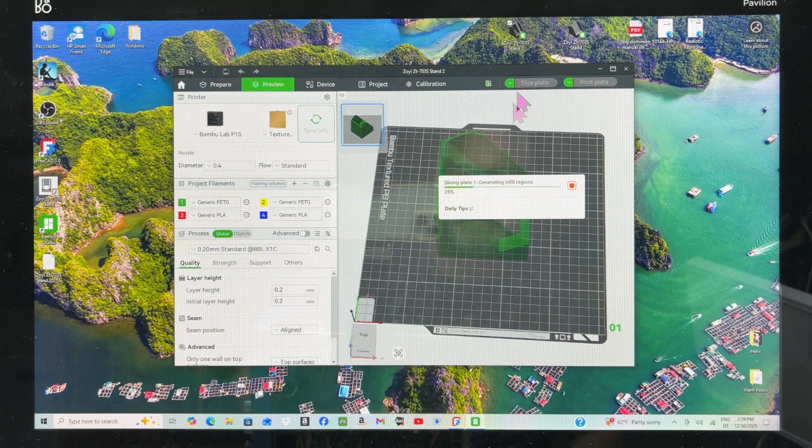Slice is okay. Also tells you here how many meters of filament you're going to use, or how many grams. I go by the grams because I know what my empty spools weigh, and when I start getting low, I can weigh the spool, and then take the empty weight, subtract it, and then I know how many grams I have left on the spool, and I can pick my projects to finish off the filament without much waste.

I don't know, there's no way to do it meter wise. Weight gets real close. This is 95 grams. I would make sure I have at least 105 on there, extra 10 grams, and then there's very little waste.

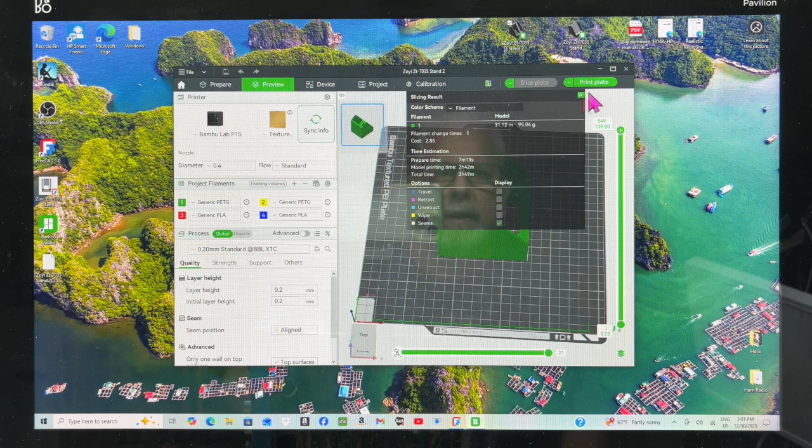So we are done there. We can hit this up arrow, that just gets rid of that box, and we can hit print.

I have my printer already turned on. So here, we got it on the plate and we sliced it. And now we're going to go to print plate. And now the printer comes up, and you got to click on this box here.

And then that gives the 4 boxes from the AMS. I know I want box 2, and because that's the gray PETG. I'm going to hit send.

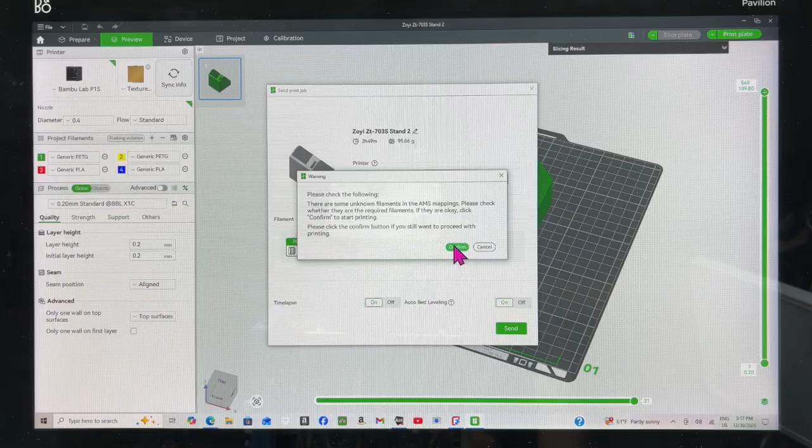And this box pops up when you're not using Bambu filaments. I'm using a generic PETG, so then I just confirm, and now it's off and on its way to the printer.

I'm going to get out of here, and we'll head over to the printer.

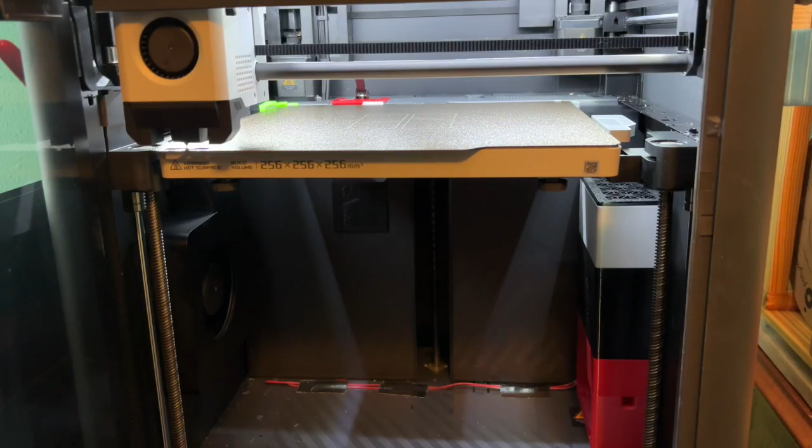Okay, here we're in on the printer, and it's about to get started printing. It's just waiting for the temperature. There it goes, so it makes a little test pass here, and then I'll start the actual print. I'm not going to run the whole print here for you, but we'll show you the start and try and get the finish.

And then we can do a test and see how it fits. We'll just run a little bit here just so you get a feel for it.

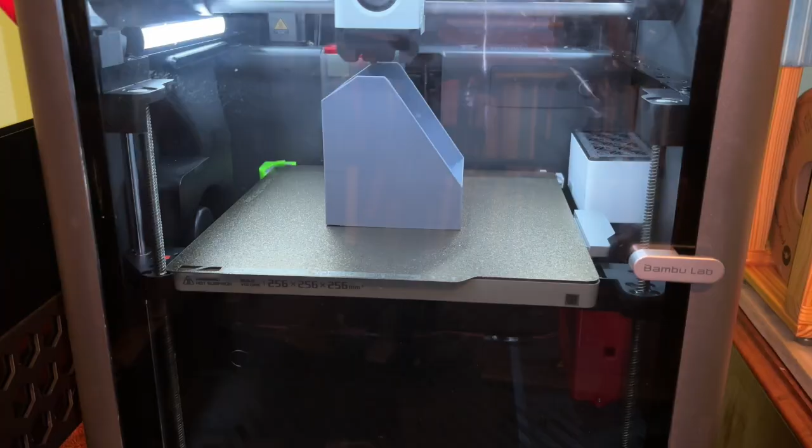Okay, that's enough of that. I'm going to turn this off and I'll see if I can catch it when it's on the finish. Otherwise, we'll take a peek when it's all done and try the meter out on it. We'll be back soon. Here it is, just finishing up here the last few minutes.